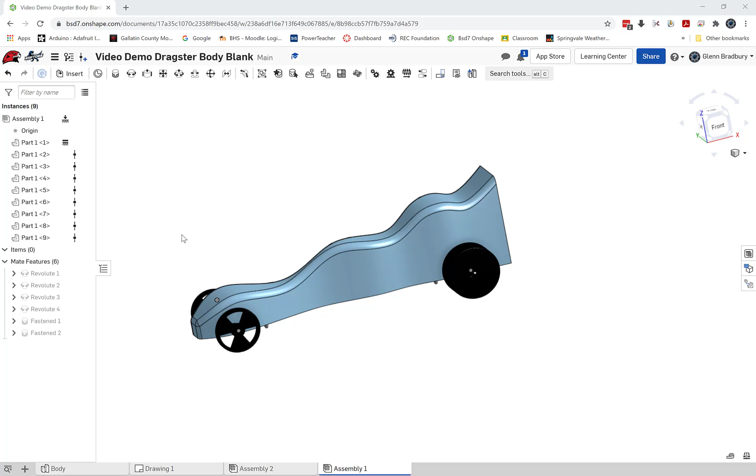In this video, I'm going to show you how to create an assembly that shows your assembled car using the parts that I've shared with you via Onshape. The final product will look like this.

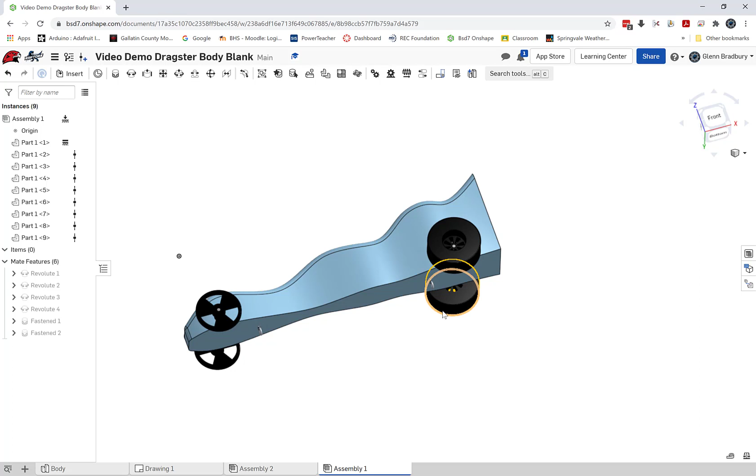You'll have your car, your wheels, your axles. It'll even have the eyelets in the bottom, so remember you need to have the holes drilled for those. In case you haven't done that, you need to go back and put those holes in. As a tip, it's a good idea to make those holes 1 millimeter in diameter and 3 millimeters in depth, and that will make those holes fit in there pretty good.

So to do this, we're going to go into the assembly tab of your car body, and when you start you're not going to have anything, so we're going to hit the insert button, and the first thing we're going to insert is your actual car body. We're going to go ahead and place that, and then we have to place other documents or other parts, and that's the wheels, the axles, and the eyelets.

If you go to the other documents, you'll be able to go to the shared with me folder, and you will see the files that I have shared with you. You'll have an axle, front wheel, rear wheel, and then the dragster screw eye. Those are the things that we need.

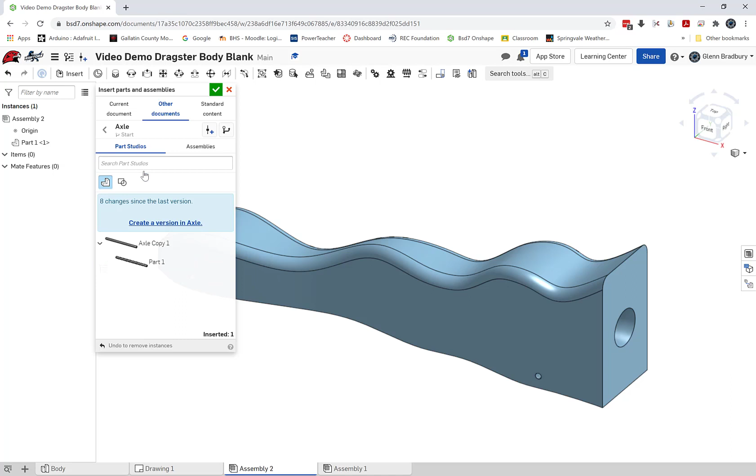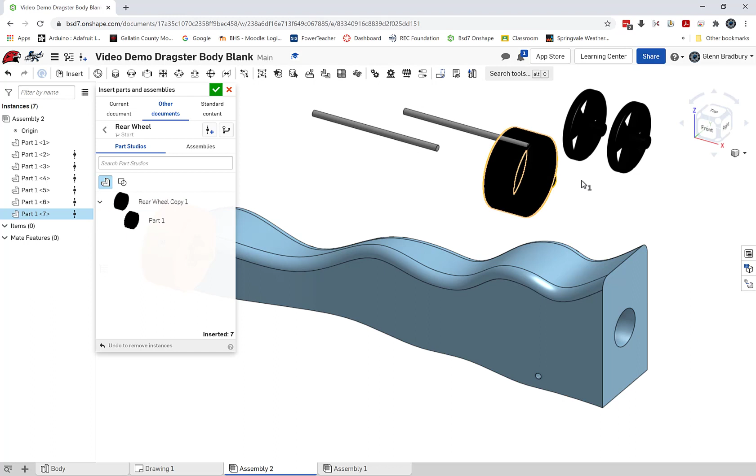So I'm going to start by bringing in the axle. I'm going to bring in 2 copies of my axle, so I just click on the part twice and bring it in. Then I'm going to come back here and bring in 2 copies of my front wheel, just put that over here. And same thing for the rear wheel, 2 of those, and then lastly we're going to bring in 2 copies of the screw eyes.

Once you have all those, you can go ahead and close that box. Step 1 is you want to take the first part, part 1, the car, and you want to right click on that and fix that in place. That will keep the car body from moving around, and it'll bring all of the parts to the car body when we do the assembly.

In the past, we've done pretty basic constraints. We used the fastened mate for the whole thing when we did puzzle cubes, and that's a very rigid mate that locks things in together. In this case, we're going to use one of these other mates. For most of these, we're going to use the Revolute mate. The Revolute mate allows you to have something locked in place from side to side, but it'll rotate, so we could actually animate this if we wanted to.

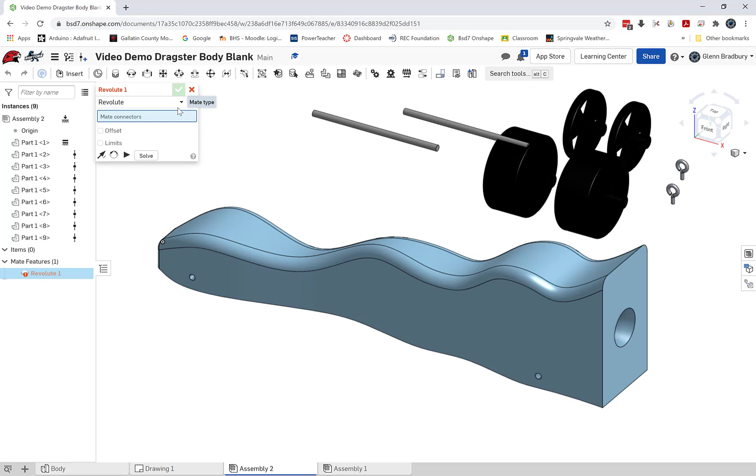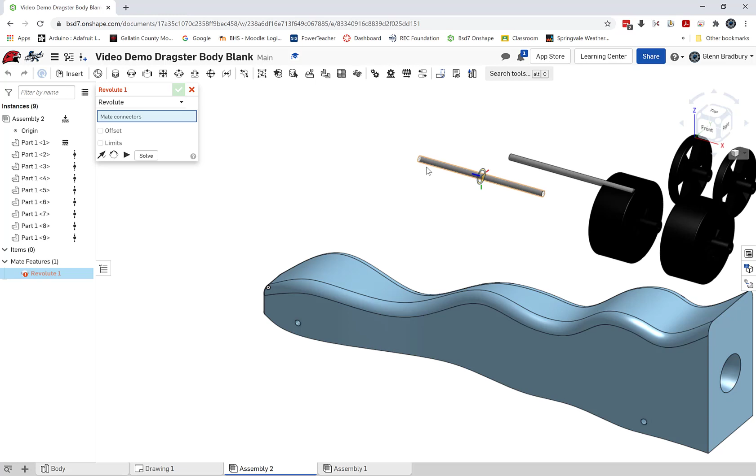I'm going to go through and click on my Revolute mate, and I'm going to show you a couple of tricks. Putting the axles in the holes is the first step, and that can be a little bit tricky. So we're going to zoom in here and choose the front axle. What I want to do is make sure that my axle is kind of halfway through. If you notice, when I highlight the actual axle, there's a spot here right in the center that you can use as a mating constraint, a location, and that's what we're going to actually use.

To get that same spot in here is a little bit tricky. A lot of times it'll come up and it won't put the mating constraint snap where you want it. In order to get what you want, you kind of have to hover over it a bunch of different times - I was kind of stuck in this side view part. So we're going to come back in here. We want to get in here to where we can hover into this part of it right here. The problem is that sometimes you go to grab what is the center of this, which will be here, and you see it disappears every time. That's really frustrating.

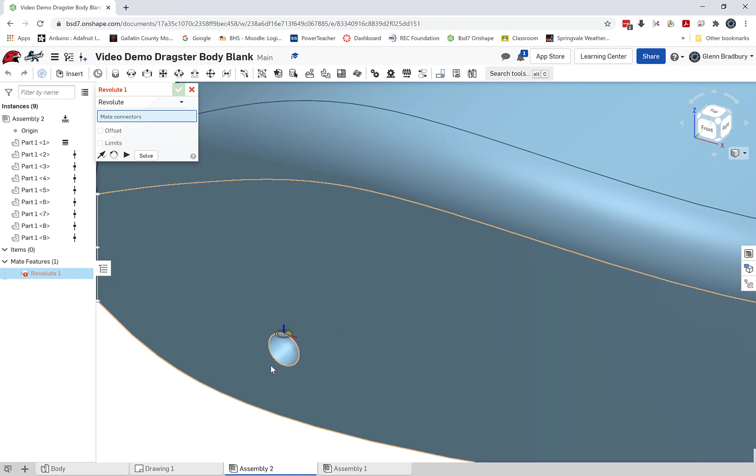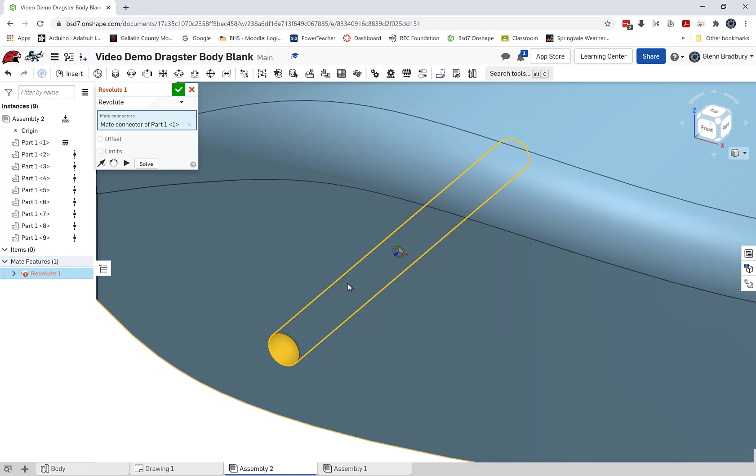Well, here's a trick to keep it there. Once you have the right thing highlighted, it's previewing for you what you want. If you hold down Shift, you can move your mouse over to the snap that you want to use. Then you can let go of Shift and click, and it'll select that mate connector snap. So I've just selected that middle one right there. Now I'm going to come up here to the axle, and I'm just going to select the middle one there.

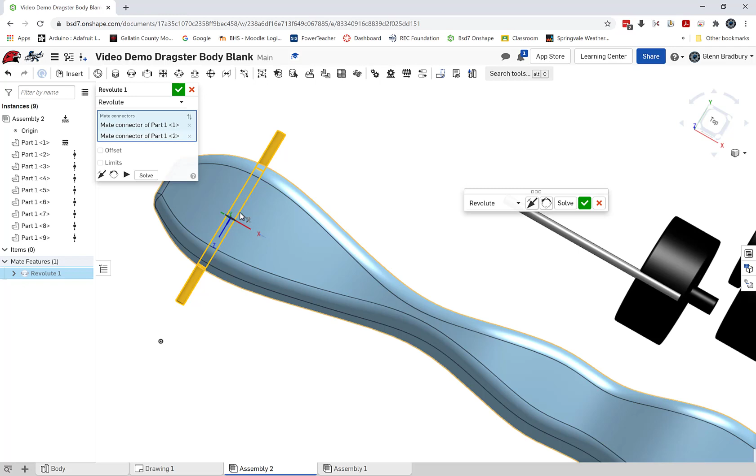What you'll see is when it previews it, it's going to put that axle and center it in that opening for you. So you don't have to worry about trying to figure out how far it is from here to here to make these two even, because it's using the center of both pieces, it makes it even automatically.

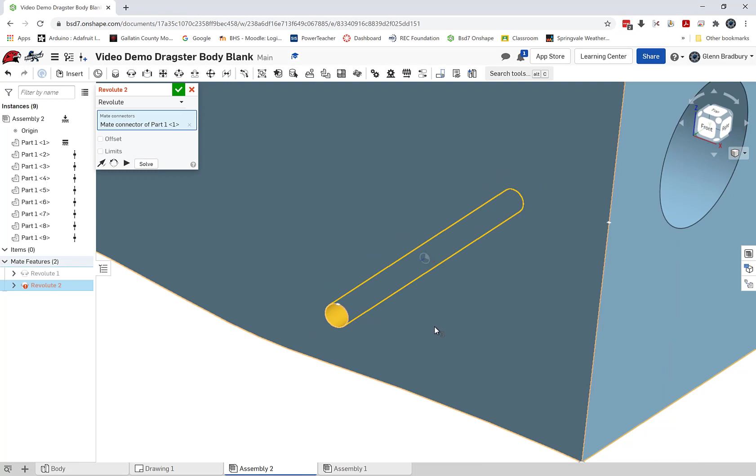So I'm going to go ahead and say OK to that, and then do the same thing again for Revolute 2. I'll zoom out and choose this same thing, and you'll notice I highlighted it. I'm going to hold down Shift again, let go of Shift, and click on that center spot. Then I'll come up here and choose the center of that axle, and click OK there. It automatically wants to go to the next one, so we're going to place some wheels.

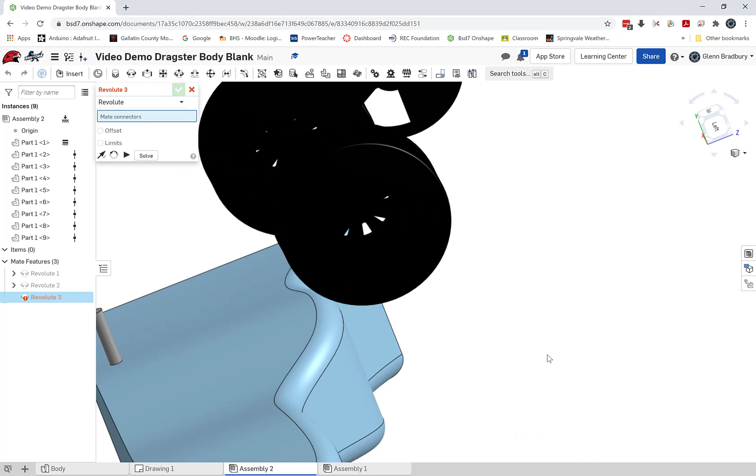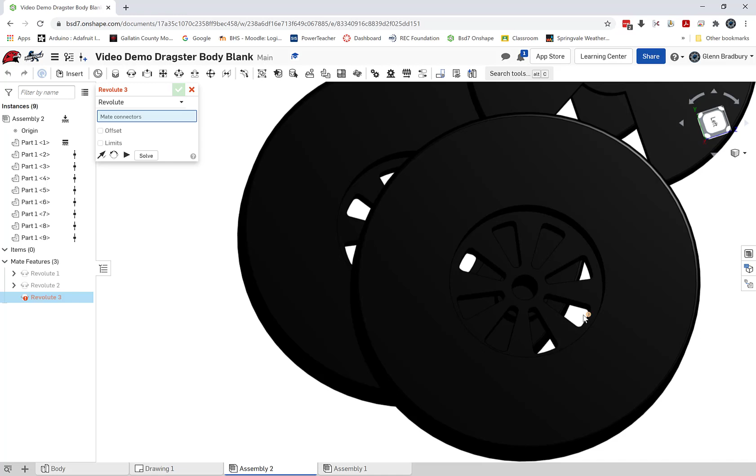Now on the wheels, if we look at these, they're set up with an inner side and an outer side. When we rotate around this way, the black wheels are kind of hard to see things in, but when you highlight these you'll get a whole bunch of different snaps. On the wheels, see this hole right here, there's 3. You want to use this outer hole, the one that's flush with the outer surface, because the wheels are hollow. It's hard to tell on the angles we have here because they're overlapping, but the wheels themselves are hollow.

So I'm going to go ahead and choose that spot right there, then come in and zoom in on the rear axle and choose that. That will be okay. Now if you look at it and say, well hey, this plastic piece is running in, don't worry about that. We'll fix that later in the physical model. We don't have to worry about that in this computer model right now.

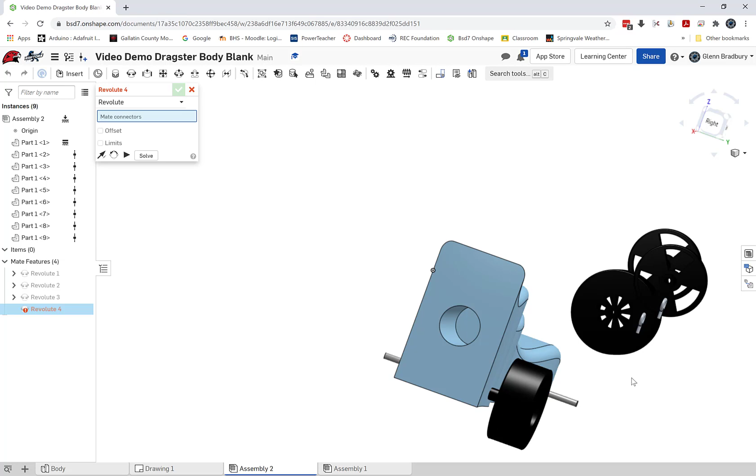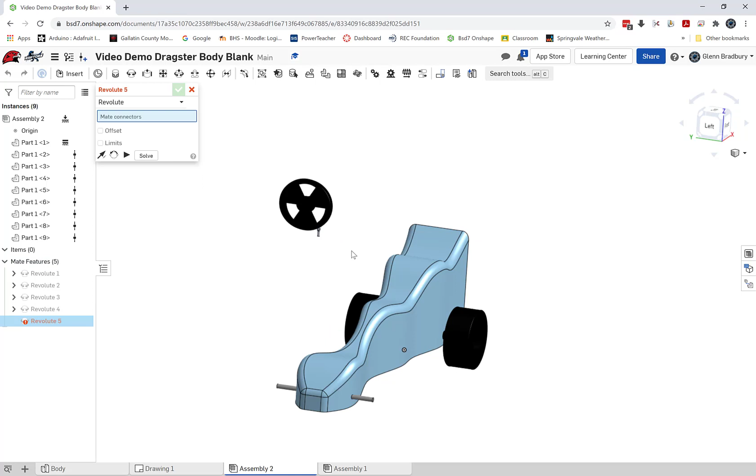So I'm going to rotate around and get back. Now here's the shading is good, you can actually see that surface, so here's a better view of what we're looking at. So I want to use this opening right here. I'm going to click on that, zoom back out, go to the other side, and choose that part of the axle, and we'll select that. Front wheels are basically the same.

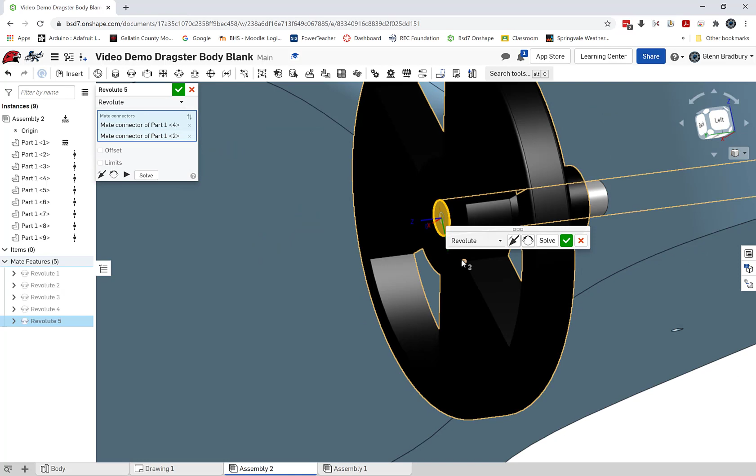So you want to get in that orientation so this plastic hub here is on the inside, and we're going to use the outside of the wheel. So again, I'm going to zoom in and let's see if I can get the shading right. There we go. I want to use this opening right here, so I'm going to use that snap, and come in here and choose that right there. And then the same thing on this wheel, that spot there, zoom out, and we're going to put that wheel on there. So we've got our wheels on.

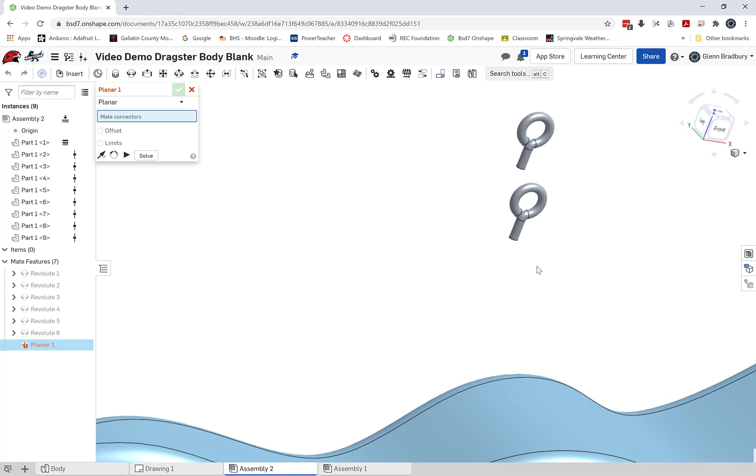Everything looks good. The last little bit is to go ahead and use a snap to put these eyelets in. In this case, we're not going to use a revolute, we're going to go back to our planar mate. We do want to lock these in pretty good. So what I've found works best is the same thing, we're going to use that center point mate right there. So I'm going to choose that center point of the cylinder on that screw eye.

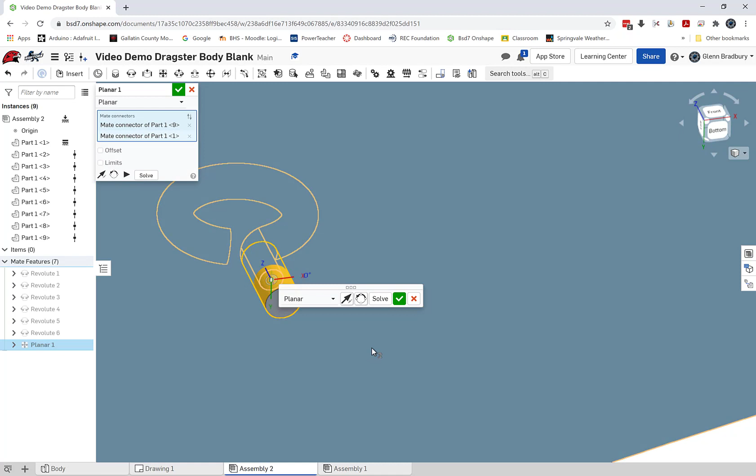And then we're going to turn the car upside down, and I'm going to zoom into the wheel, or to the hole, and I'm just going to use the surface. The reason I do that is because it's going to stick out a little bit. And you'll see right now the eyelet is sticking into the car, so let me move this box real quick. I'm going to hit this arrow and rotate it out so it's sticking out, but it's also the wrong direction, so I'm going to rotate once so that it's going across the piece.

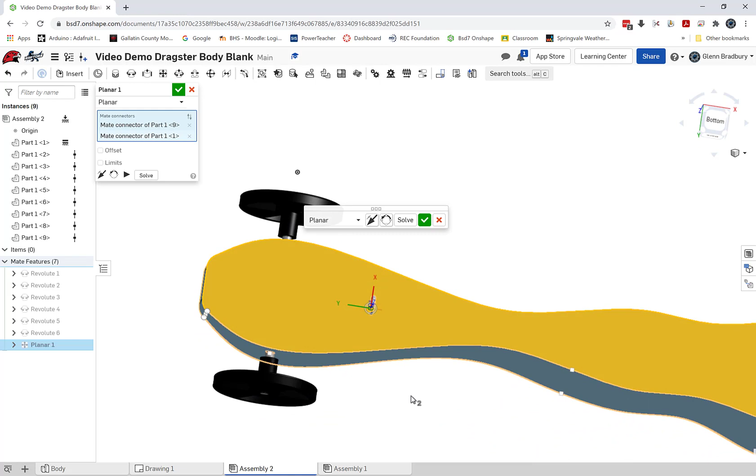Now when we actually put these in, of course we're going to put these in a little bit differently, but for the computer model this is going to work just fine. So you're going to see that it sticks up like that, so I'm going to go ahead and say OK.

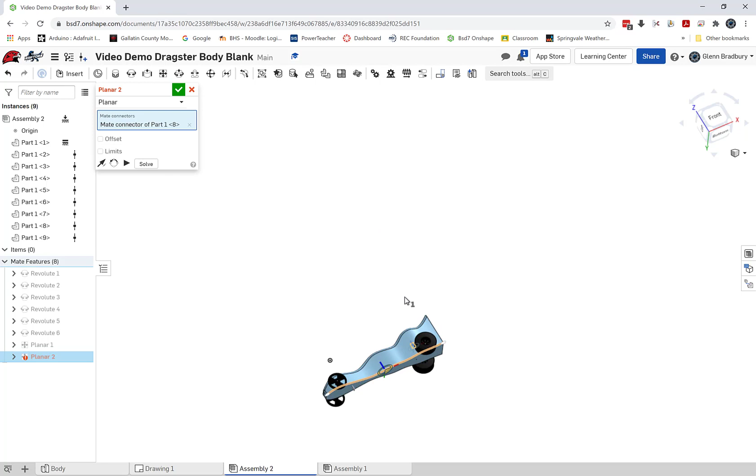Alright, same thing again. I'm going to zoom out, find my eyelet, come in, choose that center one. Didn't select it. Let's go back in, select that center mating location, and then come underneath, zoom into the hole. I'm going to choose the hole, get it so it sticks out the right direction and it's rotated the correct direction. So you can see that. There you go. And I hit OK.

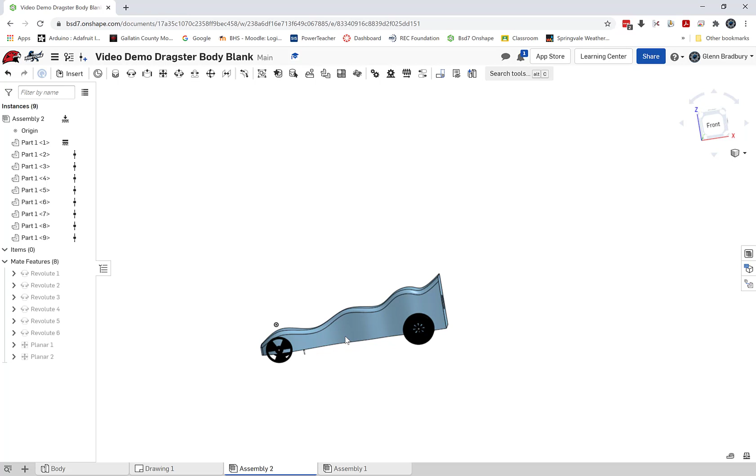And there we go, that's all the assembly you have to do. This will allow you to get a rendering of what your car is going to look like. It'll also allow you to create an assembled view engineering drawing, which you will need so you can actually show what your dimensions are from the bottom of your car to the bottom of the wheels and things like that. And that's how you create an assembly in Onshape for your CO2 dragsters.